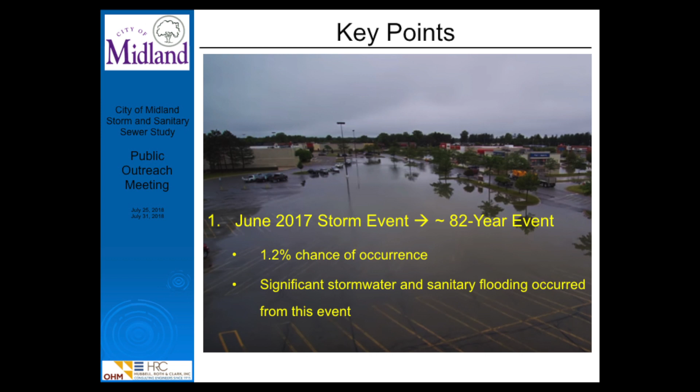So I just want to make that point, because we're going to talk about the two different types of flooding.

Some of these flooding complaints are related to wastewater, and some are related to stormwater. In not every case do we know what caused the flooding, because the complaints may not tell us that. When you have basement flooding or basement backups, it could very well be a wastewater issue, but it could also be a stormwater issue. But anyway, we focused on the city's infrastructure in some of these areas where there's a higher density of complaints.

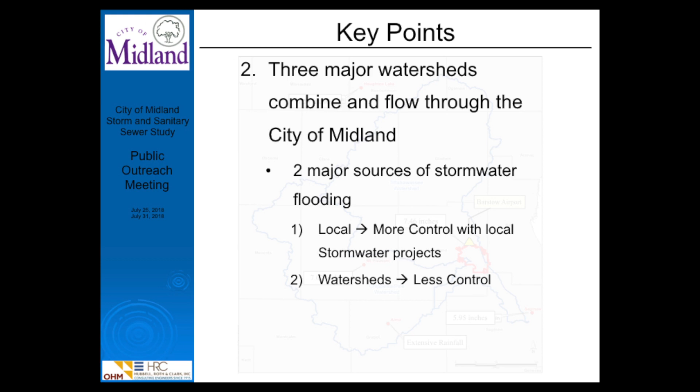I talked about this, the local versus the watershed flooding. Local flooding happens when a storm sewer doesn't have enough size or capacity to handle the water that comes down by rainfall — the city has control over that. What the city does not have control over is the level that the flow gets to in the Tittabawassee. That's due to rainfall in the watershed. On the Sturgeon Creek, there's a lot of flow, and there was also some debris in the culverts and bridges that caused the water to back up, so there is some control there. However, all the flows that come down through those creeks and rivers — the city doesn't have any control over the amount of flow that comes down those rivers. It's kind of an important thing to state.

One of the reasons we're looking carefully at the stormwater system — flooding is a bad thing in any case, but because we're also looking at the wastewater system, it's really important to look carefully at where it might flood. If it floods in certain neighborhoods, on the streets, in backyards, in parking lots, etc., how long does that water hang around and how deep is it? Because all these manholes you see in the street — if you've got a lot of water for a really long period of time, that water can get into the wastewater system. We don't want it to get in there, because if it does, the city has to treat it, and it can overwhelm the city's wastewater system. So part of the goal with the Stormwater Master Plan is to improve the city's stormwater system so the water can get through without flooding to the surface and interacting with the wastewater system. We're trying to minimize that. We'll talk a little bit more in detail about that in a few more slides.

We talk about this term, it's called level of service. Really, it's how well is the sewer serving the community — what level of protection does it provide? For stormwater systems, most communities go with what we call a 10-year storm. A 10-year event means a 1 in 10 chance of being exceeded in any given year. So there's still a pretty decent chance — a 1 in 10 chance — of the system being overwhelmed based on that standard. But we worked with the city, and the city currently has in its ordinance a reference to the 10-year event, so we used that to set the level of service.

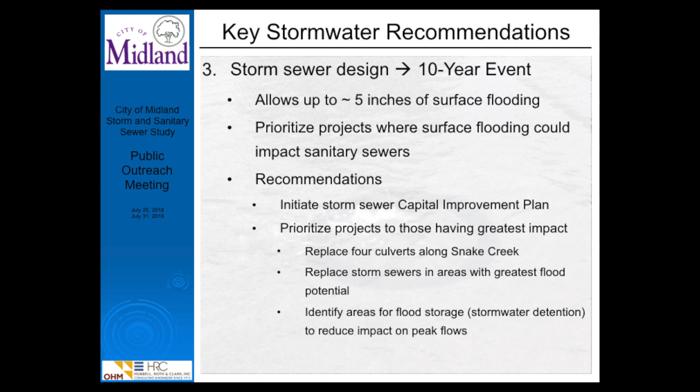I do want to mention Sturgeon Creek as well, on the west side of town. We did not identify any particular culverts to be replaced there yet. The reason is, given the budget constraints, Sturgeon Creek is so big in terms of the watershed that studying it in great detail at this stage would eat up too much of the budget.

But we did have access to some videos from the flooding, where we could draw conclusions and make recommendations to look at some of those areas more closely. So Sturgeon Creek is important, although it doesn't show up on this capital improvement plan. There will be projects for maintaining that creek, keeping it open for flow, and looking at those culverts and bridges. That's something that will be explored.

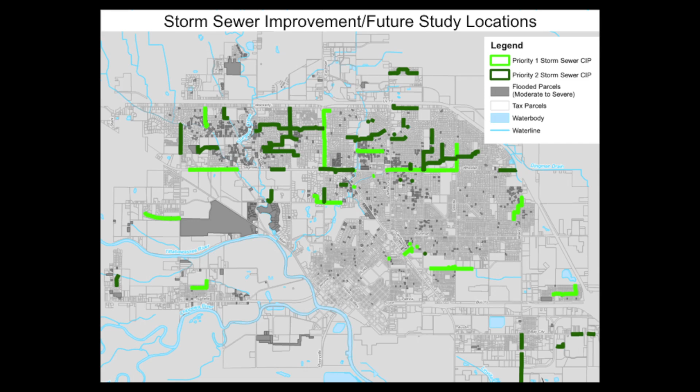Some other recommendations we've made: it's not just about replacing storm sewers to make them big enough to handle rainfall events, but also inspecting them on a frequent basis. The city is more proactive than most in that they flush the system and clean it out regularly. But what most communities don't do, because they don't have funding sources for it, and Midland is no exception, is televise the system.

They basically drag a camera through the pipes, typically for wastewater pipes. Stormwater systems are different because there's no funding source associated with them. So we're recommending a more frequent sewer televising program to find out if there are sewers that are clogged or have structural problems that need replacing. Some of the flooding we think occurred up on Joe Mann Boulevard near the mall is due to a sewer blockage, which is why this is important.

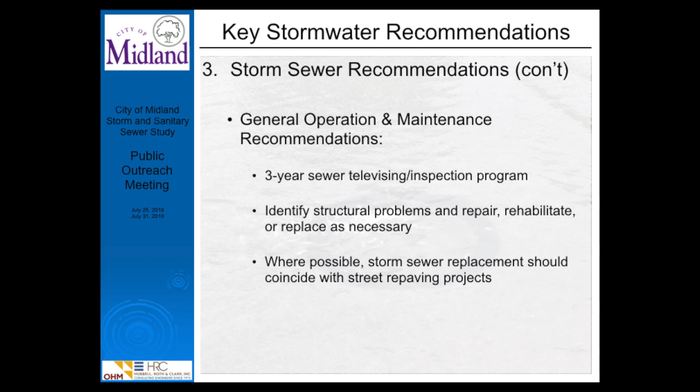The city's stormwater system is getting older. Cities throughout Michigan and the country have aging infrastructure that we're not able to replace at the rate we need to keep it in decent shape. So inspecting and televising it is a low-cost way of staying on top of projects that need to happen before they become emergencies. We want to get to those projects before they become real emergencies and flood residences. This operations and maintenance program is really an important part of the recommendations.

When we put all these projects together, the ones shown in light green and dark green, which are culverts, detention ponds, and storm sewers, priority 1 totaled $29 million worth of projects identified. Priority 2 projects totaled another $50 million. So replacing storm sewer is not cheap.

It requires ripping up the road. In most cases, you're digging down 6, 7, or 8 feet or more below the road surface to put in a new pipe. These are usually not small pipes, much larger than sanitary sewers, and usually heavy concrete pipes, so they're not cheap to build. That's why we're looking at costs in this range.

This also includes some of the culverts on Snake Creek that were found to be undersized. As I said before, there are still some areas along Sturgeon Creek that need to be looked at in terms of debris removal, and maybe looking at those culverts and bridges to make sure they're big enough to handle the flows coming through. That will need to be explored in the future.

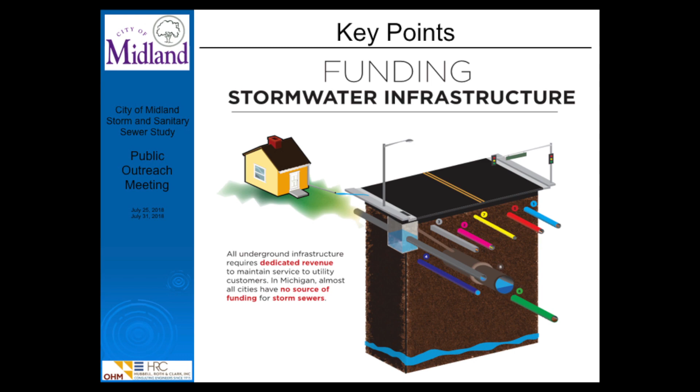That'll be a topic of future discussion, and we've made some recommendations to the city with some options. So that's basically a rundown of the storm sewer. I'll be around to answer any specific questions you might have on specific neighborhoods, after Tom is done, on stormwater drainage. So thank you.

Well, I think this thing was... excuse me. Can you hear me? No? Okay. All right, well good evening everybody. My name's Tom Maxwell. Still can... I guess you got to put it right up next to your lips.

All right, my name's Tom Maxwell. I'm with Hubbell Roth Clark, and basically I worked with Greg and the city team to come up with capital improvements for the wastewater, or the sanitary sewage collection system.

First, I'd like to talk a little bit about the sewer system. It's a complex system. It was started as a combined sewer system, a single pipe system, basically in the 1930s. During dry weather flow, it takes on the sanitary sewage from residents, industry, etc. During wet weather or storm events, it also takes on the stormwater runoff. So it's a single pipe system that serves both functions, and that was started in 1930.

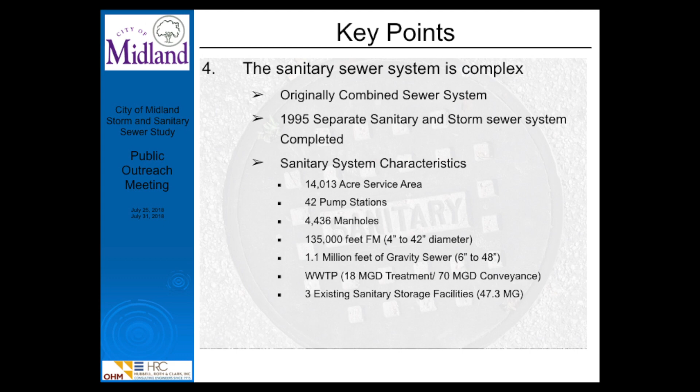So why would a sanitary sewer system be wet? Isn't that for the storm sewers? It's kind of confusing when you think about it, but there's a phenomena called infiltration and inflow, and we'll go through that real quick. The only other thing to be aware of, which Greg brought up and explained well, is that the level of service or design event required for a sanitary system is a 25-year event. So for that storm or event, you have to design your sanitary system to not allow any sanitary sewer overflows to the environment. You'd have basically a 4% chance in any given year for that event to occur.

So let's first talk a little bit about the infiltration sources. Another common way of describing this is rainfall-dependent infiltration and inflow, RDII — engineers love acronyms. Infiltration sources are related to groundwater, and they can get into your system through broken laterals, root intrusion, faulty connections, cracked pipe, deteriorated manhole, etc. It's impacted by the groundwater table.

So inflow sources, those are more direct. Basically, when you have an inflow source into your sanitary sewer, you see those sources really quick, and they're related to surface runoff elements.

They could be associated with the roof drain connection into your lead into the sanitary sewer. Footing drain connection, which up until 1987, the city allowed footing drains to be directly connected into the sanitary sewer, and that's not uncommon. Many communities have the same impact to their system and allowed that as well. You could have a clean out on your lateral with no cap on it.

Here's a common phenomena that occurs, and it can really impact your sanitary sewer when you have a cross connection between the storm sewer and the sanitary. And then just a faulty manhole.

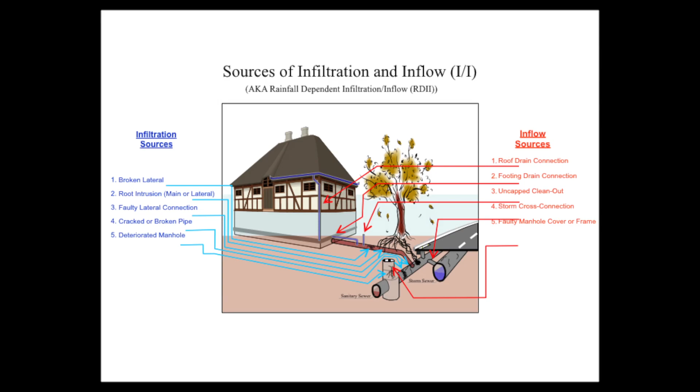So this phenomena, you can imagine this is the Tittabawassee River. When the Tittabawassee heads up and basically gets above flood control, it greatly impacts the system. And Greg did a good job of talking about that, because all this water could either get in even into the windows, into your basements directly from runoff, but also get into that uncapped clean out, get into the footing drains, and also into manhole covers, pump stations, anything that would be along the Tittabawassee River. And you folks, it's very common for communities to put their major interceptor along with the river because it flows with gravity down to the low point, which is where typically you'd put the wastewater treatment plant. And unfortunately, I think that's a significant influence on the system when the river heads up and surcharges when a high stage occurs.

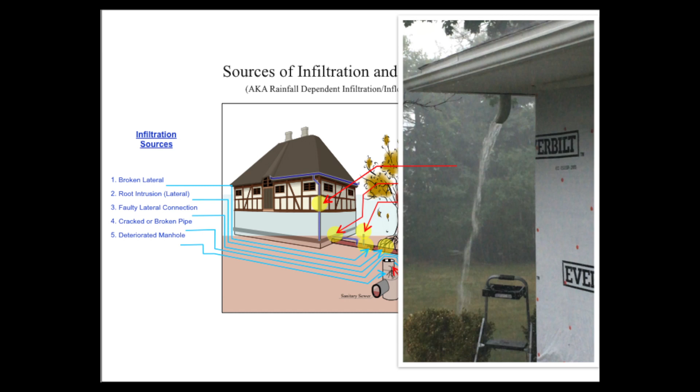So here are some solutions. We're just going to go through these real quick to kind of give you a flavor of solutions, and a picture's worth 1,000 words, so that's what these are for.

So for infiltration inflow reduction, you can do a footing drain disconnection program. Other infiltration inflow removal techniques, lining the sewers is one, which is a good thing because it extends the service life of your sewer. Floodproofing structures that are in that drainage course, in your situation that's the Tittabawassee River.

Now here's another item that you can do. This is alternative B in the report. It's called improved conveyance. So basically what we're trying to say here is that some of the sewers that you have in the ground, the existing sewers, they don't have the hydraulic capacity to take that peak flow from the infiltration and inflow that's getting into your sewers. So it heads up the sewer system, and unfortunately sometimes it gets into your basements.

So how you remedy that problem is you can increase the sewer capacity by installing a newer, larger sewer, or you can put in a parallel sewer. The other thing you can do is go in and increase your pump station capacity. I guess the key for improved conveyance is to make certain that whatever improvements you do, you just don't carry the problem downstream. You make certain that the sewers downstream have the capacity to take on that additional peak flow.

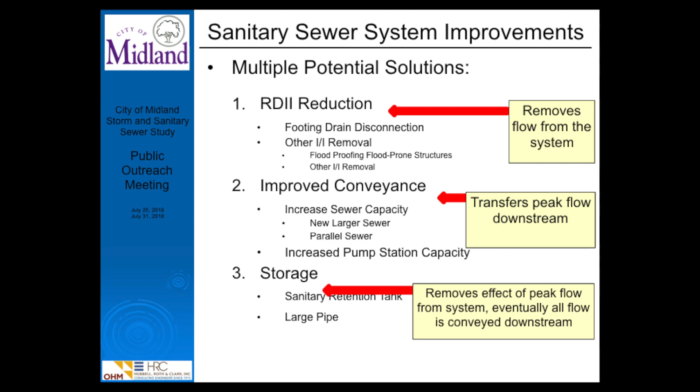Another commonly used technique is storage. Typically it's offline storage in the form of a retention tank or a large pipe.

So what does infiltration inflow reduction do? It removes the flow from the system, and that's ideal because then you just get away from the source. You don't carry it down to the wastewater treatment plant and have to treat additional flow, as Greg mentioned. So it's a great thing to do. It's not always an easy one.

The improved conveyance, like I said, eliminates that surcharging of the sanitary sewer and conveys that peak flow downstream.

And in storage, what that does is it peels the excess flow off of the system and puts it into a holding facility, whether it's a large pipe or a tank. And then when the event's over, we're going back down to dry weather flow conditions, we've got capacity in the collection system again, so you dewater that storage tank back into the system. So those are alternatives A, B, and C that we did in the report.

So this is a pretty typical home. As I mentioned, there's approximately 9,000 of these in the city.

But here's your downspout. And you can think back of that video that I put in there. If that was directly connected into the footing drain, which a lot of times they used to be, they don't always now. A lot of people disconnected them and extended them out, preferably 3 to 6 feet from the edge of the house.

But this has the footing drain connected into the sanitary lead that goes out to the sanitary sewer. And that's a problem. The only other thing to think about is that even if you've got this disconnected and it extends out from your house, you've got the limits of the original excavation of your home, right? And they put granular material back in there.

And as you can all relate, trying to dig into Michigan soils, a lot of times it's just a sandy loam or a clay. So oftentimes in Michigan, basically what you're creating is a clay bathtub, so any of this water that comes out of that downspout goes onto the ground and then percolates or infiltrates down into the ground and eventually gets into that footing drain. So you're not going to see it like you saw it in that video. It's not going to come directly and that quickly, but you're going to see it eventually over time.

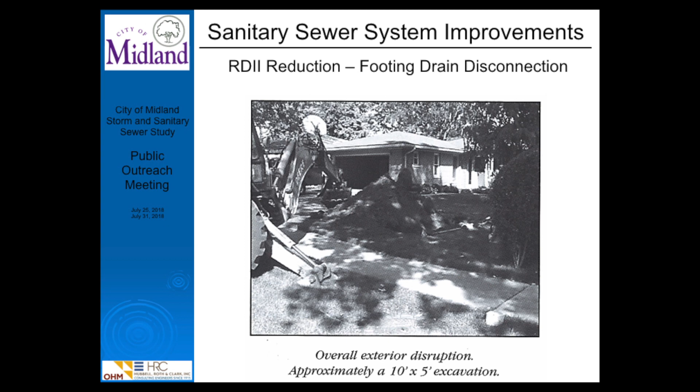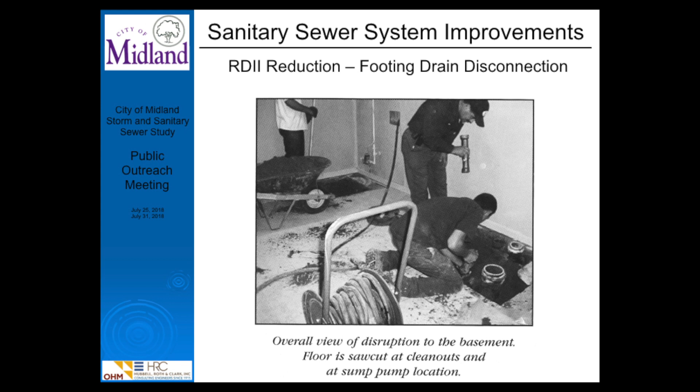Here's some gentlemen going down and actually, I think, doing a pretty good job of minimizing the impacts to the basement, but they're digging up in areas where they're going to put in a new sump pump right here, and they're going down into where the sanitary lead goes down and ties in and disconnecting the footing drain connection.

And what you see right there is the finished product. So it's definitely painful while it's going and happening, but in the end run, it's not too bad. You put it in your mechanical room, it's out of sight, out of mind. But you just got to make certain now you've got an extra maintenance thing that you are responsible for, to make certain that if it's not working, you don't flood yourself out.

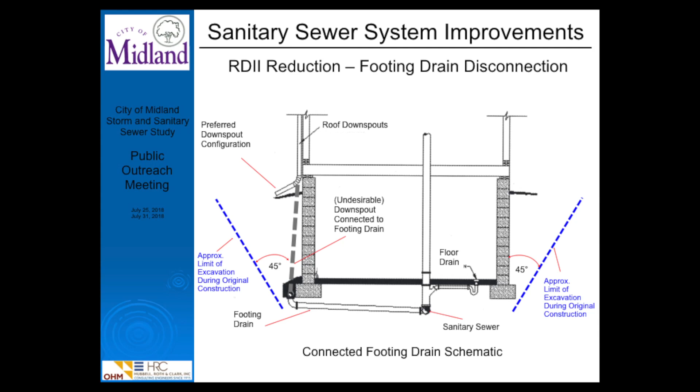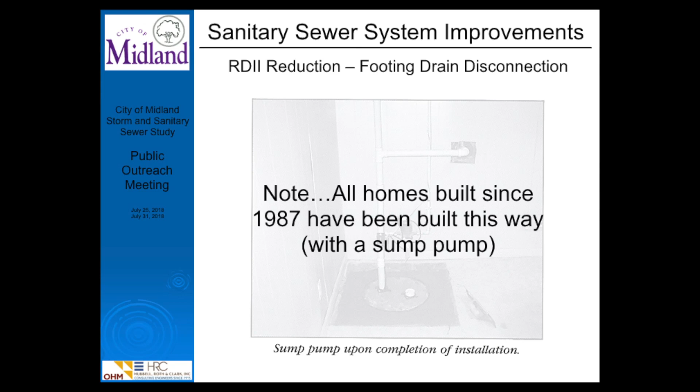The only good thing about it is if it happens, it's groundwater, it's not sewage. A slight compromise. And just to note, as I mentioned, any house typically built after 1987 is built that way with a sump pump.

Now you can see this is a manhole with a chimney that's extended above grade, and typically you would do this like in the banks of the Tittabawassee, to try and get that manhole cover above a certain flood stage, and then basically flood-proof that chimney to minimize the infiltration or inflow that's getting into the system.

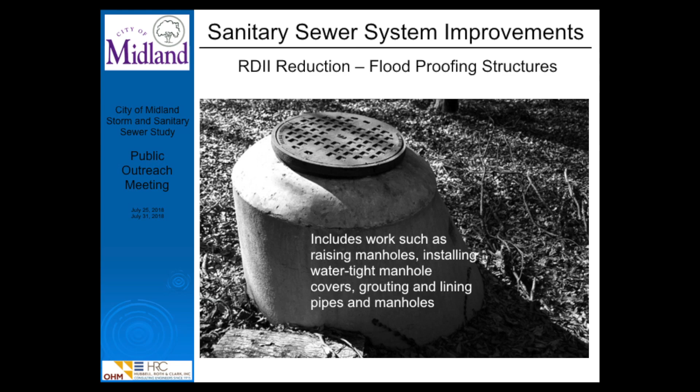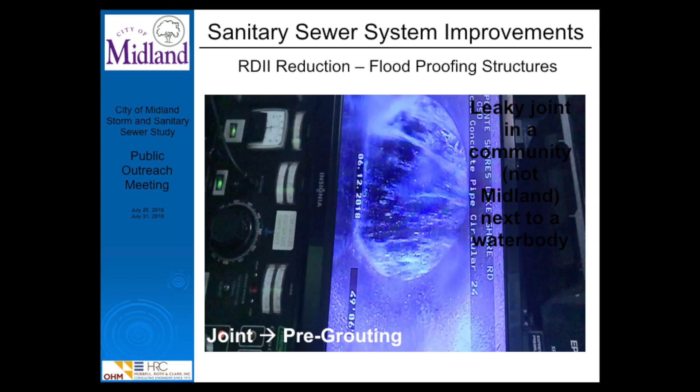And I think this is a good video and an eye-opener as well. This is a community, it's not Midland, but it does happen, and it's a community that we're working with in southeastern Michigan. And somehow that flips sideways, but it essentially looks like Niagara Falls. And that water's coming in through a joint in the sewer system. So that would be a case of infiltration.

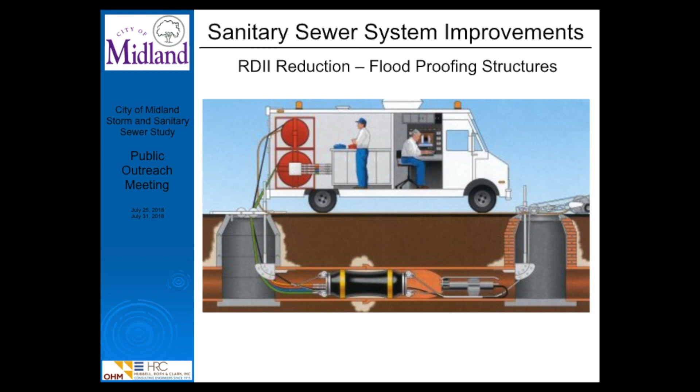So a way of addressing that, you can see with this animated picture, this is a grouting operation. They put this bladder down in the sewer, and then they pressure grout these leaking areas. This picture is that bladder you saw in the animated picture, and it had just completed - this is post condition, where they grouted that joint that was so heavily leaking water was coming through with infiltration.

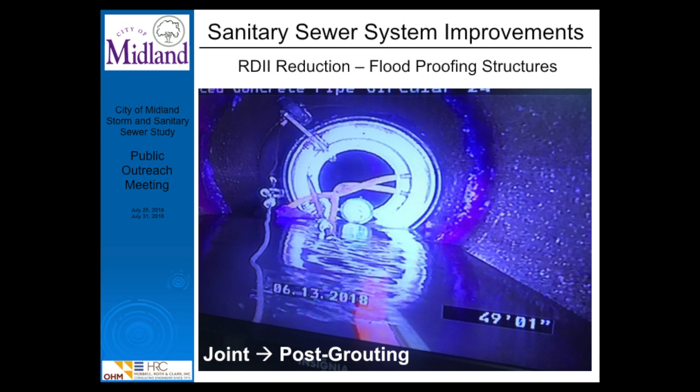Another thing you can do is go in and line your sewers. All of these little cracks and joints, which can occur over time, basically allow infiltration into the line. But the nice thing about putting a liner in like this is you seal out that water intrusion, but you also increase the service life of your sewer.

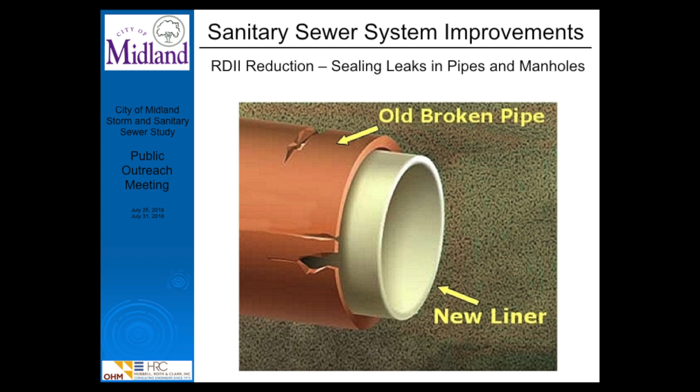So in essence, you've got another 50 years for the sewer, because these sewers don't last forever, folks. We put them in the 1930s and they're still working. So we've got a pretty good bang for our buck, and you think about it - but some of these have issues, and this is a way of addressing both.

Here they're just flood-proofing the chimney of a manhole.

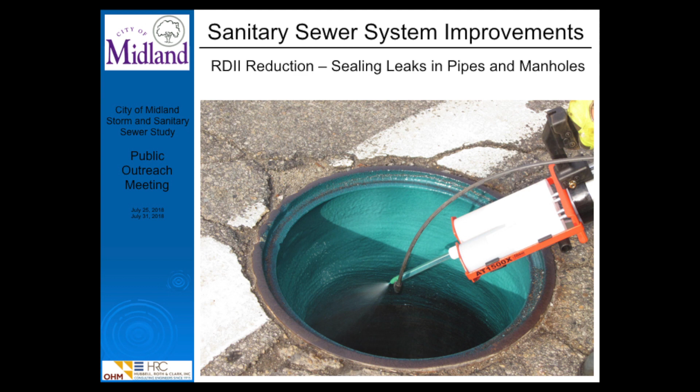Now this is, I think, a good example of conveyance - communities going in to basically improve the carrying capacity and minimize any backups into the basements of homes. This is a larger sewer, and they're replacing the existing one.

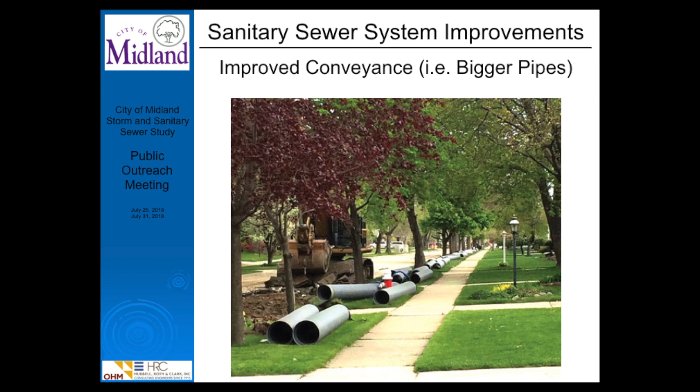I guess the reason for this slide is to show you that it's great, but it's also a little painful - the disruption to the neighborhoods and whatnot, you're tearing up the roads. It's not real fun for the neighborhood.

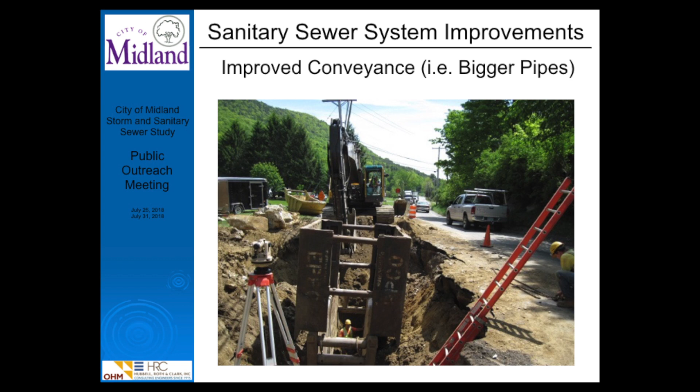But the nice thing is, when you're done, you typically put in new utilities along with this, because you don't want to go back in and rip up new roads, and you've got new roads. So that is one good advantage of this.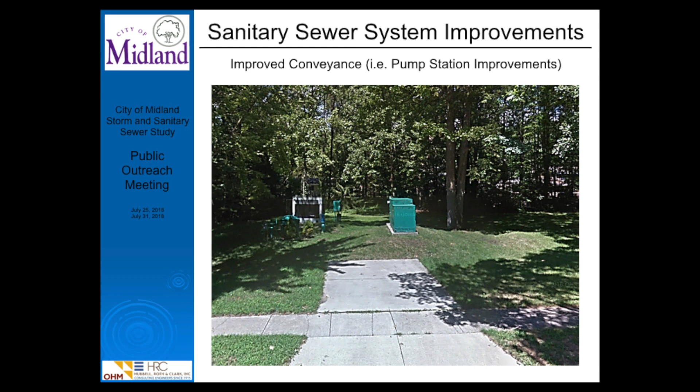And then there are times when the pump station basically doesn't have the capacity to address the peak flows, whether it's due to I&I, whether it's due to development, whatever the reason being, or maybe it's just served its useful life and it's time for a new one. But you can see that's very disruptive.

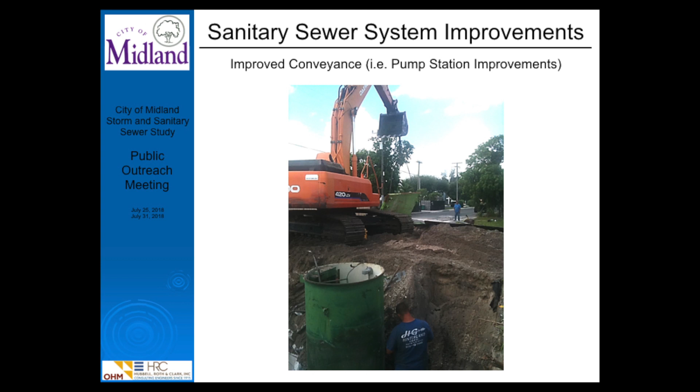Storage - offline storage, in this case, in the form of a tank. So when the conveyance of those sewer systems starts to get exceeded, instead of going into your basements, it goes into this holding facility. That's during the event. After the event, when the collection system recedes and you've got capacity in your collection system, you would dewater this facility back into the collection system.

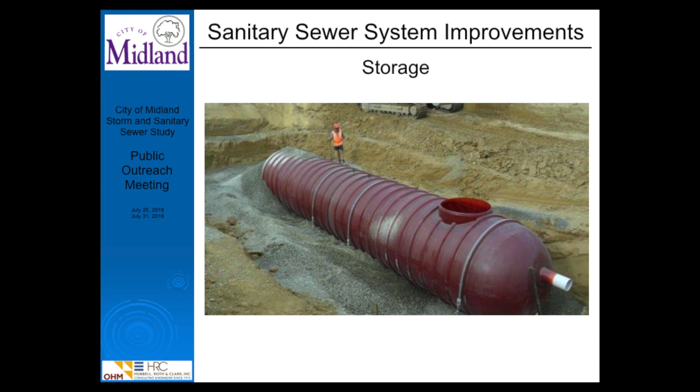And this is just a picture of what you might see from the surface for a project of that nature - it's minimal. And all of these are explained at great length in Section 7, or Chapter 7, of the Volume 3 report.

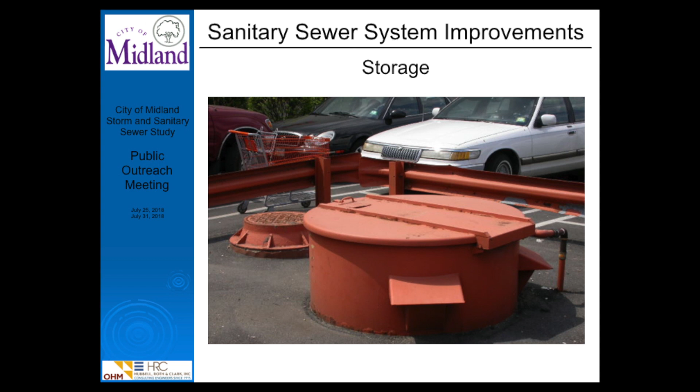So, the improvements - essentially we've got Priority 1 and Priority 2 areas, and those are the capital improvements that were addressed for the most part in the study. The Priority 1 areas are the ones we're saying you should go after right now, and Priority 2 would follow Priority 1. These areas basically showed flooding.

We looked at the model as it related to the complaints and verified all those areas to coincide with the June 2017 event. For the Priority 2 areas, we saw that it was starting to surcharge for the June 2017 event, but that didn't necessarily mean that it surcharged. But for the design event I mentioned earlier, the 25-year event, these areas definitely were prone to flooding, so we've got to address those too.

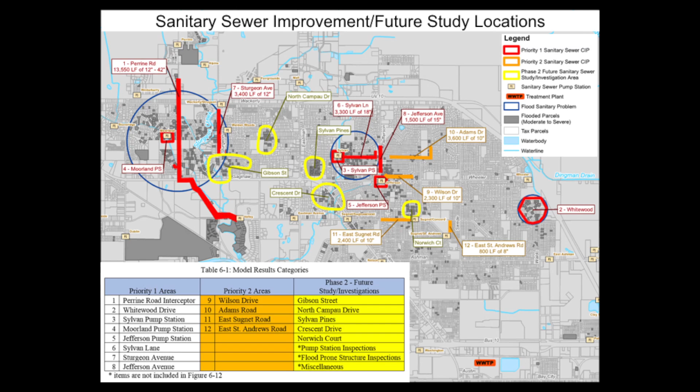And then phase 2 are areas that we couldn't get to agree with some of the flooding complaints that occurred, and we're suggesting that you go in and do some additional investigation in those areas.

The next series of slides I'll show you are related to the Priority 1 and 2 areas. We analyzed all 12 areas for 4 different alternatives: I&I reduction was alternative A, improved conveyance was alternative B, and storage was alternative C, which I showed you.

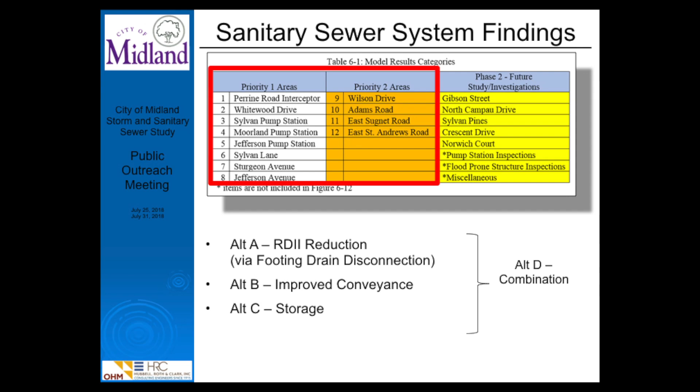Sometimes it took more than one of these alternatives to address an area, so we used a combination, and that's what alternative D was.

It doesn't look like you can read it very well from here, and I wasn't planning on going through every one of these. But this is a matrix that's in Chapter 7. It shows all 12 priority areas along this column, and all the alternatives that were analyzed for each one of those areas.

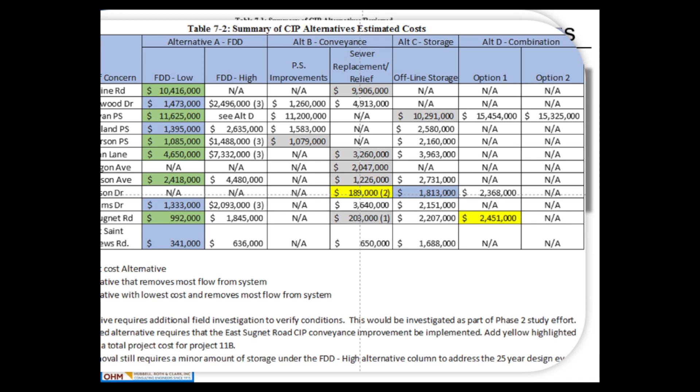Table 7-2 showed project costs to do improvements as it relates to each of the alternatives reviewed for those 12 priority areas. Table 7-3 is a culmination, a summary of all the alternatives reviewed, and you can see you're looking at a capital improvement plan ranging anywhere from $34 million to $38 million for those 12 areas.

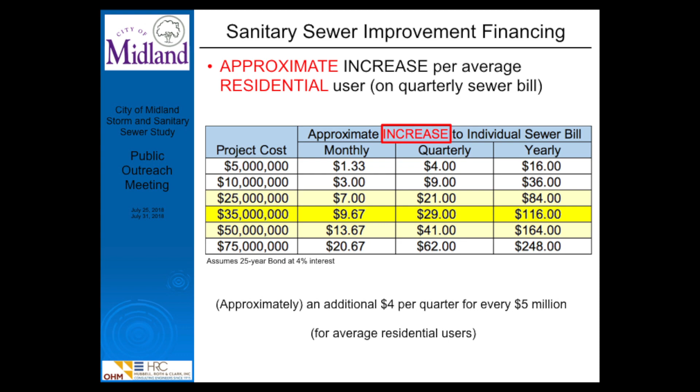Another way to look at it: for every $5 million of improvement, it would be about $4 per quarter. Because you're not going to take on this entire capital improvement program tomorrow or in 1 year. It's going to take, I don't know if it'll be decades, but it'll be at least a 5 to 15 year program.

Then there's the phase 2 area I mentioned, where we suggested additional investigation, and that's talked about at length in Section 8 of the report. There are 5 areas.

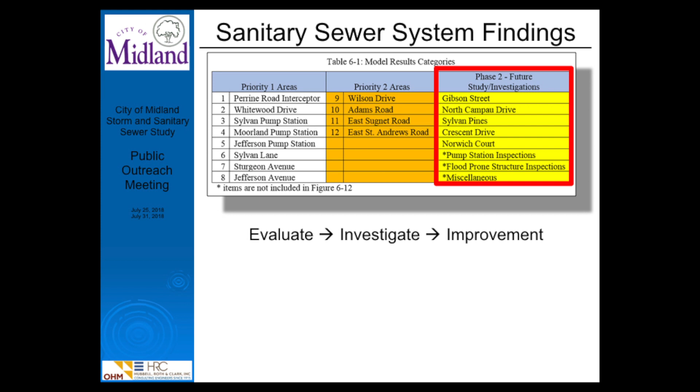What that consists of is going in and evaluating the area, typically putting in meters, and trying to break down the system to figure out where in the system the problem is coming from. Once you neck down these wet areas in the system, whether it be inflow or infiltration or both, you would go out and investigate that area.

You do smoke testing, dye testing, sewer televising, which the city already does a tremendous amount of. Every 2 years, the city televises your sanitary sewer system in its entirety. Which is extremely proactive compared to most communities, and that's a great thing.

So by going out and doing this investigation and checking into these areas of concern, you're going to get additional data, and that's going to help you out with the priority 1 areas and other areas that you might find.

During the investigation, you're going to look at priority 1, priority 2, and the phase 2 areas I mentioned, and it also might reveal other areas we weren't aware of. The more data we get, the better off that sanitary model we created is going to be.

Right now we've got some good data, but the modelers always want more, and the more we've got, the better we can make it reflect your system.

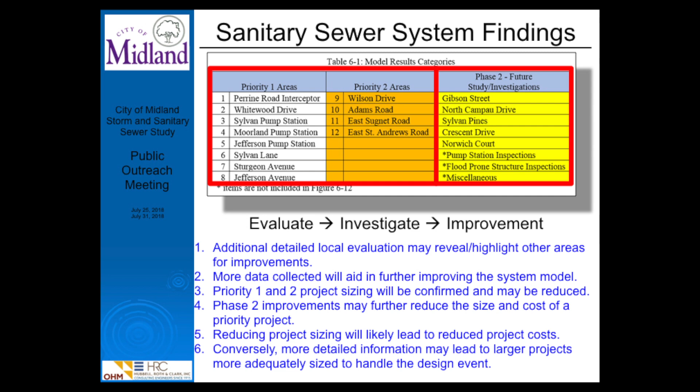With this priority and phase 2 investigation, the city is anticipating starting that, which they already have started going down that path, as I understand it. They're getting meters, they're getting instrumentation and controls for the pump stations, and we would estimate that that's going to take about a 3 to 4 year period. It's not going to happen overnight, but you really need to have rain events in order to fully evaluate and investigate these areas.

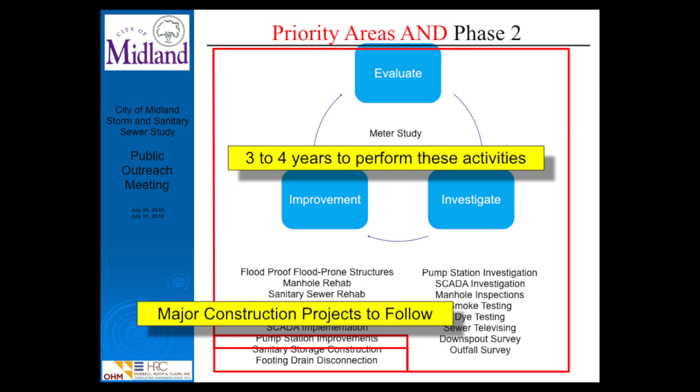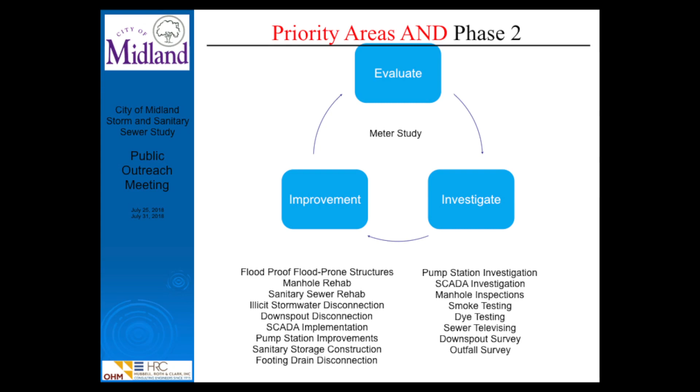So we're at the mercy of Mother Nature, right? Once we're done with that investigation and those improvements that we make, we can go back and reassess the original capital improvements, and those construction projects would follow. As I mentioned, the city has already started the efforts or the tasks associated here in yellow.

I'm almost done. Just a final note, and I think Greg did a great job of summarizing the different events, if you will, or the design events associated for a storm sewer, sanitary sewer, et cetera, and what they mean. But basically, for a storm sewer system, you design for a 10-year event, and as he talked about it, you have a 10% chance of occurrence in any given year, or 1 in 10. For the sanitary sewer design, you have to address the 25-year event, and you have a 4% chance of occurrence in any given year.

Naturally, the June 2017 storm event was an 82-year event, which was greater than both of those. And for that event, you would have approximately a 1.2% chance of having that occur in any given year. So all this is trying to say is, we can go in, we can make the improvements, but remember, we can always have a larger event, unfortunately, and that can always still impact us.

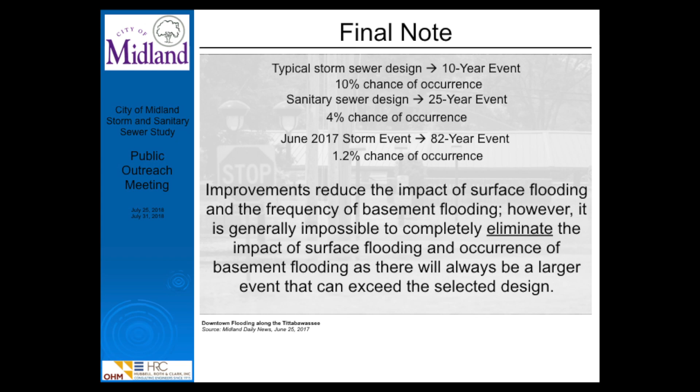So the anticipated next steps. We're going to hold another public meeting on Tuesday of next week at 6 o'clock. It's pretty much going to be identical to this one, and it's going to be held at the Dow High School at 6 p.m. The city is going to take public comments until August 7th, and we're going to do our best to accumulate all of those, evaluate all of them, and try and incorporate them in as best we can to the capital improvements in the plan going forward.

From 2018 through 2022, the next 3.5, 4 years, we're going to do the investigations and evaluate those study areas and the priority areas. As those areas are investigated and the improvements are determined, the city intends to go through and eliminate those I&I efforts through improvements.

Then in 2023, with all this additional data and knowledge of the system, the model that was created for the sanitary system would be improved, updated, and then the capital improvements would also be reviewed to make certain that the right thing and the right approach is what is happening for the city. And then from 2023 onward would be the capital improvements.